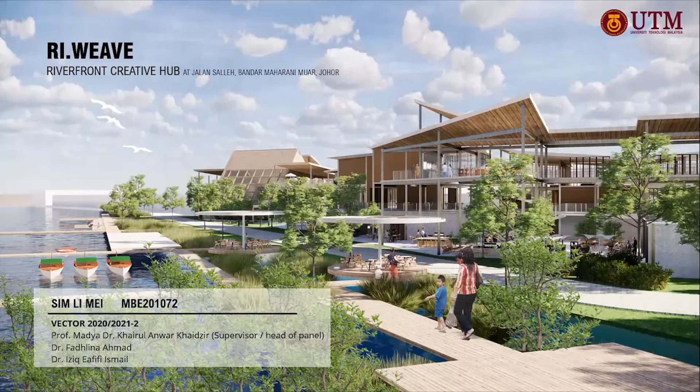Hi, my name is Limei, and today I'm going to present my pre-thesis proposal, Ri.Weave Riverfront Creative Hub at Bandar Maharani, Muar, Johor. The history of the site begins with the Kubu Bentayan, followed by the triangular shaped Portuguese fort.

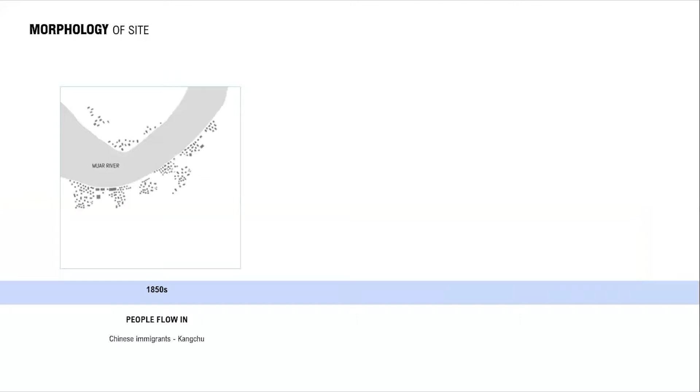For defense, and later in the 1880s it becomes a market, which was later used as Bentayan Express bus station. The morphology of the site: people start to flow in with the Chinese immigrants under the Kangchu systems. Later, people start to flow along with the administrative and trading hub built, continuing by the Sultan Ismail Bridge. People continuously flow across.

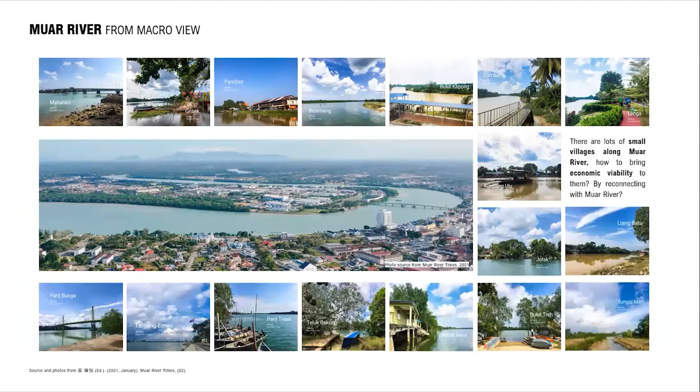Muar River is the major waterway in the state of Johor and crosses over 4 states. Muar River for macro views. There are a lot of small villages along Muar River, and hence, how to bring economic viability to them is by reconnecting with Muar River.

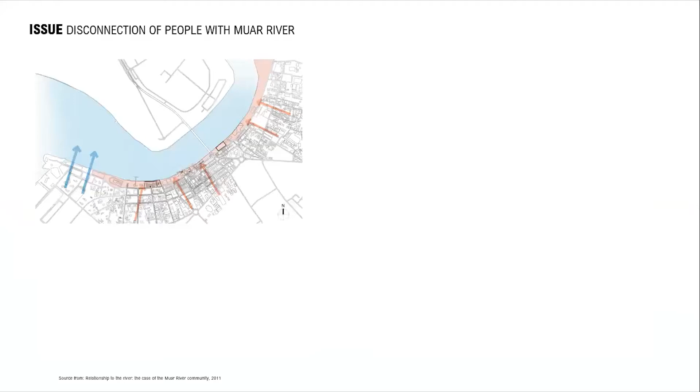This is the proposed site. It's land used as commercial area with plot ratio 1:4. The issue found outside is the disconnection of people from Muar River. The only place that attracts people to the river is at Tanjung Emas, a recreational park, but it's located further down at Muar River mouth.

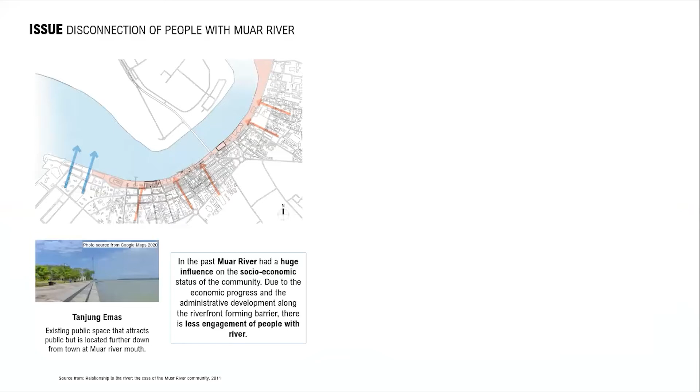The next issue is the loss in historic fabrics, whereas in the past it functioned as a market, and outside it's now a bus terminal, with an existing jetty on the side. We are going to revitalize and reinterpret the existing historical development to give it new value?

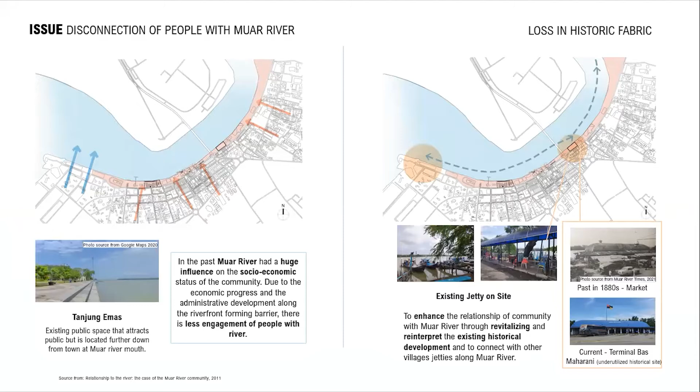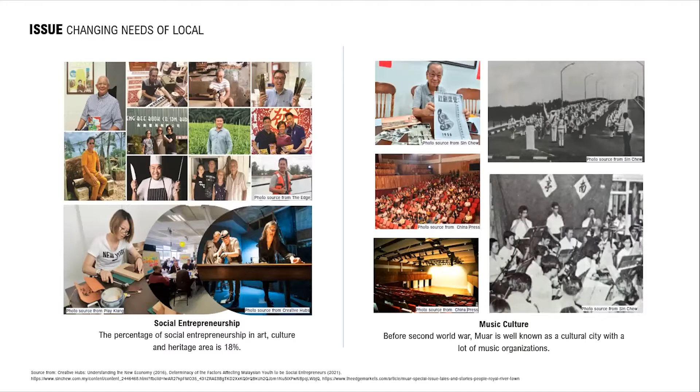Continuing this issue is the changing needs of locals. More locals have become aware of the importance of social entrepreneurship, especially in art, culture, and heritage, to make tourism more vibrant on site, as well as the music culture. Before the Second World War, Muar was very well known as a cultural city with lots of music organizations.

The research I studied extracted from past surveys shows there are more than 1,504 respondents aged 17 to 19 who study in schools along Muar River. This survey, conducted by Muar River Times this year, shows that a large number of Muar youth are interested in entrepreneurship and creative culture related occupations.

Also from the interviews, there is proof that they wanted a platform along Muar River to promote culture, art, and creativity, and they also hope they can ride boats to travel from one village to another. However, some complain that there is not much entertainment in the surroundings, hence we have to complement them with other local cultures.

So these are the aims and objectives. The aim is to create a cultural node by proposing a riverfront creative hub as a river rejuvenation strategy to strengthen the sense of belonging of locals.

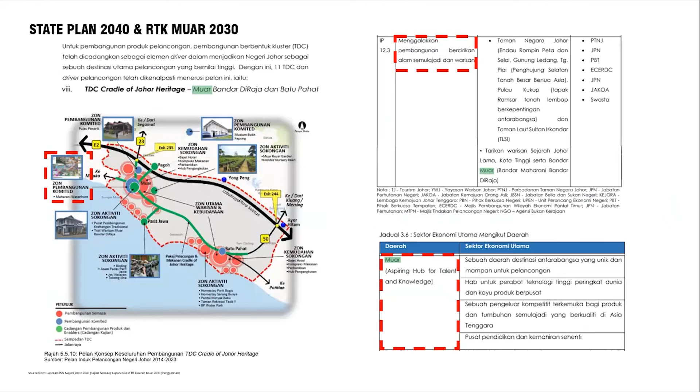This is the state plan. We follow the state plan by proposing a creative hub, as Muar aims to be an aspiring hub for talent and knowledge. For the programming, the riverfront has a river cruise, jetty, river walk, a commercial part with retail marketplace style hub, and residential living units. Hence this would connect the social, economic, and ecological parts.

And later, with the cultural theatre, gallery, workshop, and classroom, to create a sustainable, successful place, we have to study the needs of people. Later, the communal gathering space provides an amphitheatre. So this holistic process creates feedback loops between the physical, natural, and economic, hence mutually supporting each other.

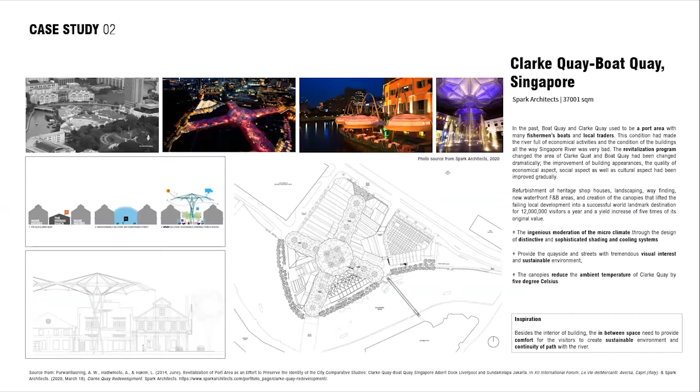Then Boat Quay in Singapore has an in-between space which provides comfort for visitors. The contextual issues are urban continuity, as the enclosed administrative buildings along Muar River separate the public from the river, and the connection of ecological and economic aspects lacks diversity and less engaging public space.

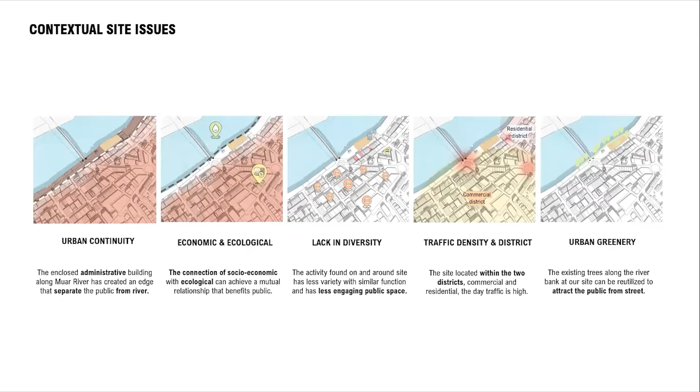The site is potential as it is located within 2 districts, and also has urban greeneries, which can be utilized to attract the public from the streets.

Hence, to reinterpret the shophouse typologies: the traditional shophouse has constraints with the linear street layout, using materials such as bricks and plasters. Hence now we're proposing a diagonal layout.

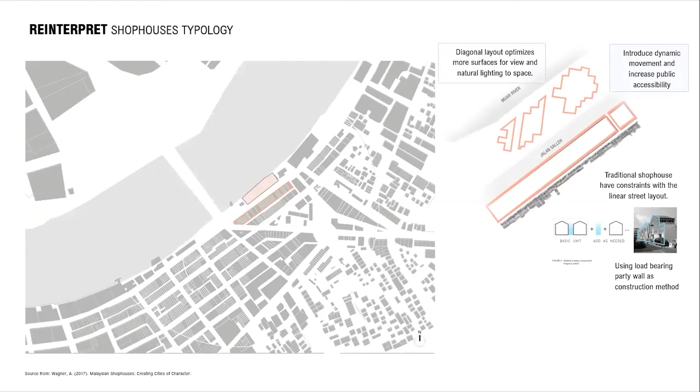This optimizes more surface for view and natural lighting into the spaces, and also introduces dynamic movement and increases public accessibility. The shophouse is also modular, so the steel structure touches the ground lightly, allowing more flexibility for future expansion. The design strategies are the axis and grids by nodes.

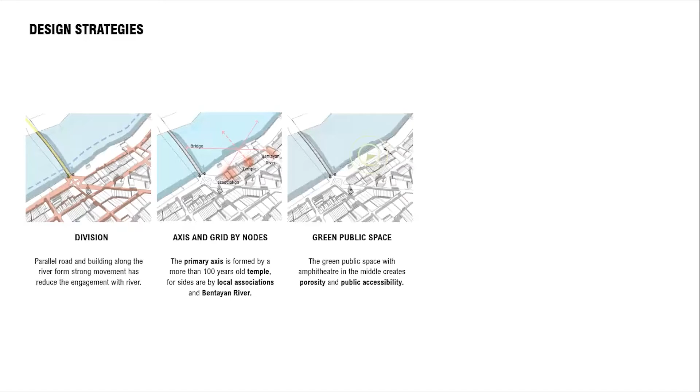The primary axis is formed from the temple, and the sides are the local associations and Bentayan River. The green public space in the middle promotes public accessibility. The connected path creates multiple entry points, and the greeneries cool the temperatures.

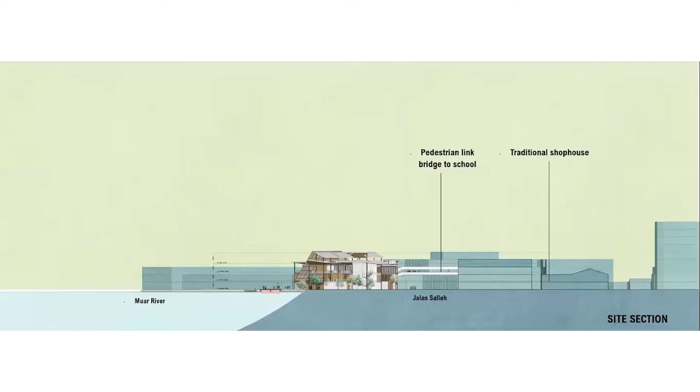This is the site section. The traditional shophouses are on the right, with a pedestrian link bridge from the schools. These are the nodes provided on site, with the Jalan Sultan Ismail Bridge on the right.

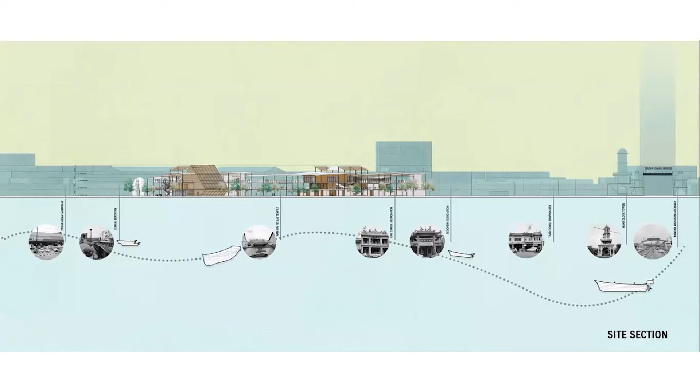This is the southeast elevation. You can see that the porosity provided in the middle is not only to frame the river, but also to frame the node of the temple. So from the temple is the main entrance, followed by the entrance of the pedestrian bridge.

They're all connecting to the walkway, river walk, and the marketplace. From the marketplace, connecting to the river cruise, and they are all connected internally, creating different vibrant contact points.

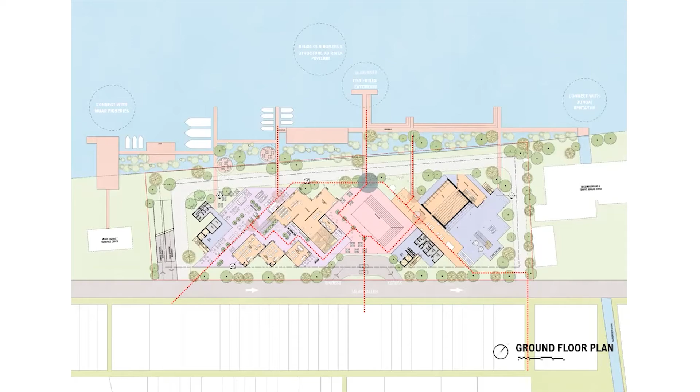The landscape is planned to connect with Muar fisheries on the left, connect with Sungai Bentayan, and also reuse the old building structure as river pavilions, with the middle reserved for future extension. These are the amphitheaters overlooking the bridge, the basement floor plan.

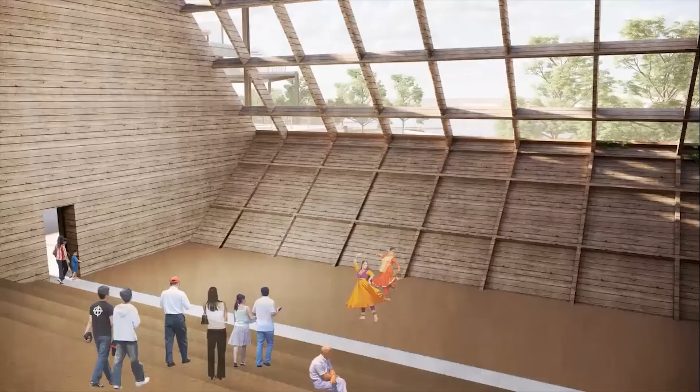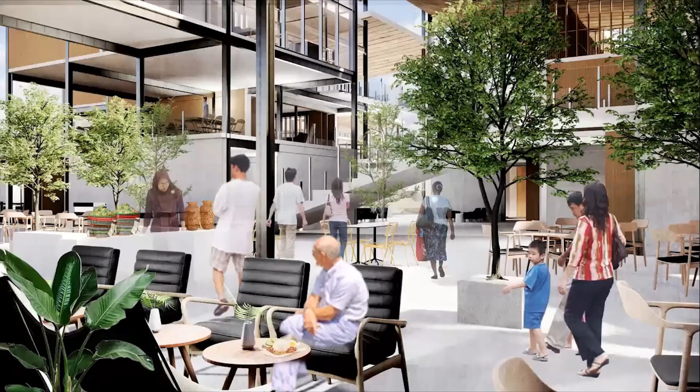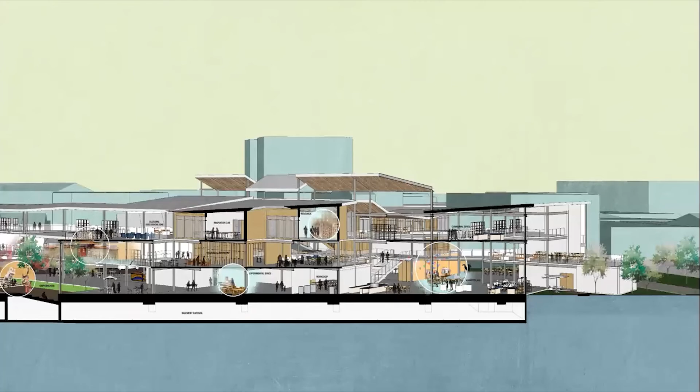These are the sectional perspectives, with the theaters allowing for collaboration and fusion performances, followed by the amphitheaters in the middle, providing more contact points, framing the temple, the resource experimental space, and the marketplace.

In conclusion, the traditional shophouses are capable of merging into the modern river rejuvenation as it follows new urbanism principles, which consist of creating communities that emphasize pedestrian movements and mixed-use activities to serve diversity.